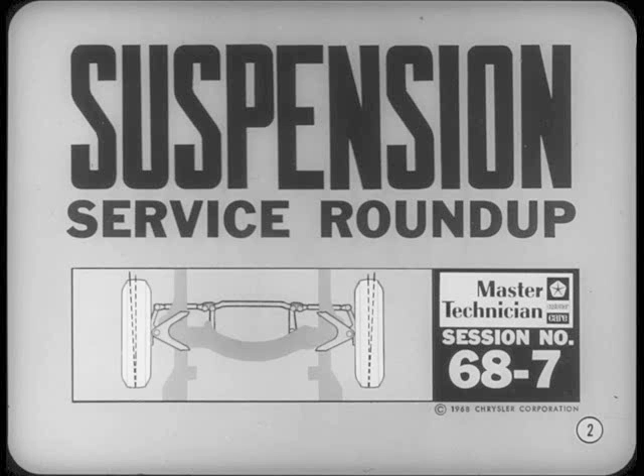Why the frown, Ted? You got a tough one? Nah. I was going to bounce this job to check the front shock absorbers, but there's no place to stand on the bumper. Well, bouncing a car can give you some idea of shock absorber action if they're badly worn or leaking. But on a car like this, you'll need a road test to make a complete shock absorber check. Well, I thought all you had to do was bounce the car to check shock absorbers.

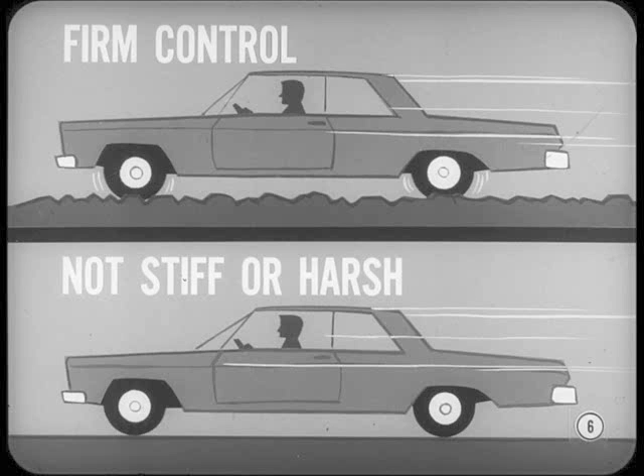Hiya, Tech. You're just in time to help us bring Ted up to date on shock absorber testing. Jim's right, Ted. Bouncing a car in the shop can't give the abrupt movement you need for a complete test. You see, shock absorbers are designed to give variable resistance to suspension movement as needed. They do this so the ride has firm control on rough, bumpy surfaces, but is not stiff or harsh on

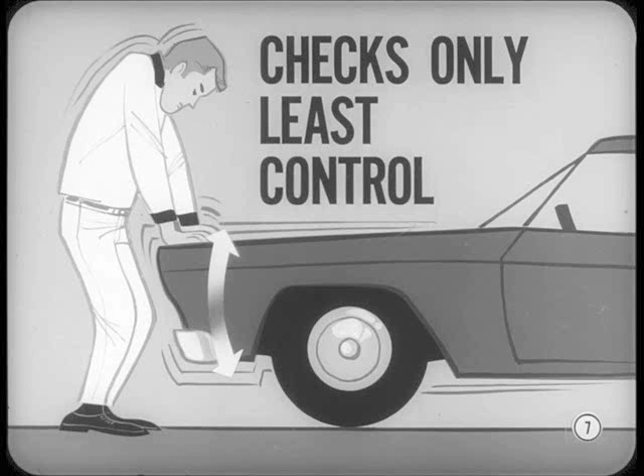smooth pavement. Now, if you try to test a car in the shop, the relatively slow bouncing movement you can apply checks the shock absorbers only where they normally give the least amount of control. Besides, bouncing may not help much to tell you which side is acting up. Why worry about sides? Aren't you supposed to replace shock absorbers in pairs? Only where high mileage or bad leaks make their general condition doubtful. On fairly new cars, there's no need to put on a pair if only one shock absorber goes sour.

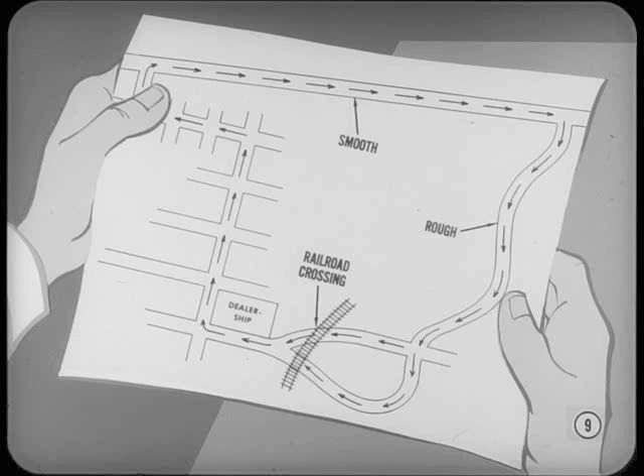Okay, I'm sold on the need for road testing, but how can you tell what's good or bad? Well, first of all, you should pick out a regular test route which includes both smooth and rough pavement, and, if possible, a fairly rough railroad crossing. When you have a run lined up, take a car which you know has good ride characteristics and drive it over your test route several times at different speeds.

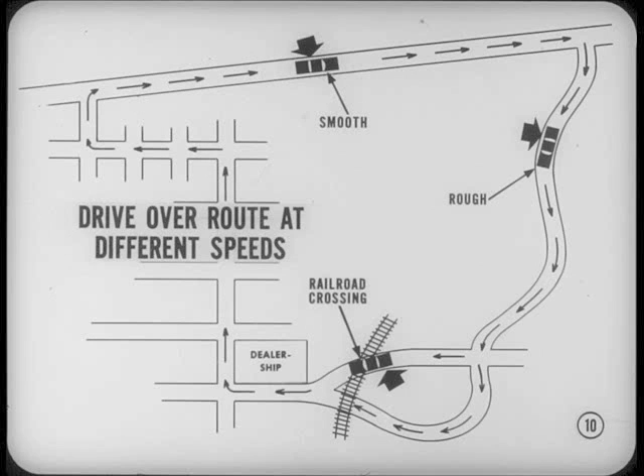This will give you a standard for comparison for checking the suspension ride control of other cars of the same model. Be sure to note the effects of specific rough spots along the route. If good shock absorber action handles them okay at certain speeds, your test car should do as well if its suspension and shock absorbers are up to standard. Why bother with a train crossing if there's a rough section of pavement handy?

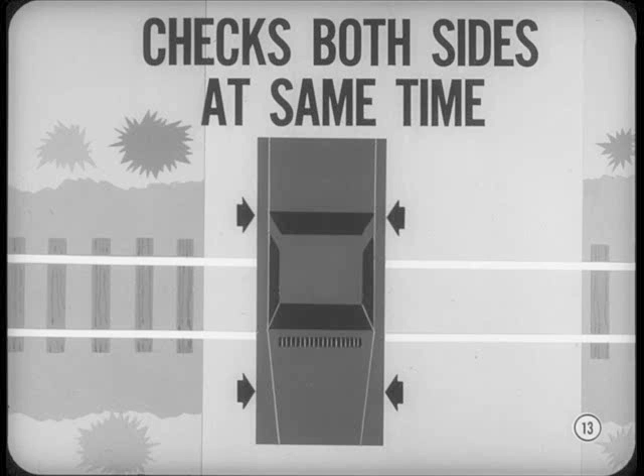Because crossings with abrupt level changes between the rails call for maximum shock absorber control. This is a good test for suspension strike-through, especially at the front end. In addition, a straight rail crossing checks the shock absorber action on both sides at the same time, as first the front and then the rear wheels pass over the tracks. If the tracks cross your drive path at an angle so the car wheels do not hit the same rail in pairs, the test will help you pick out any difference in shock absorber action as each wheel reacts separately

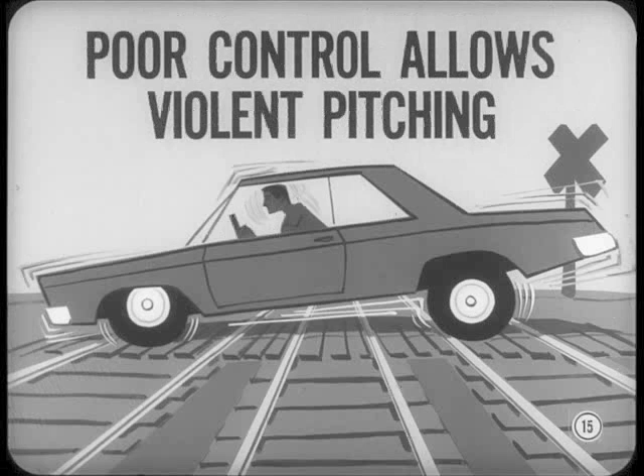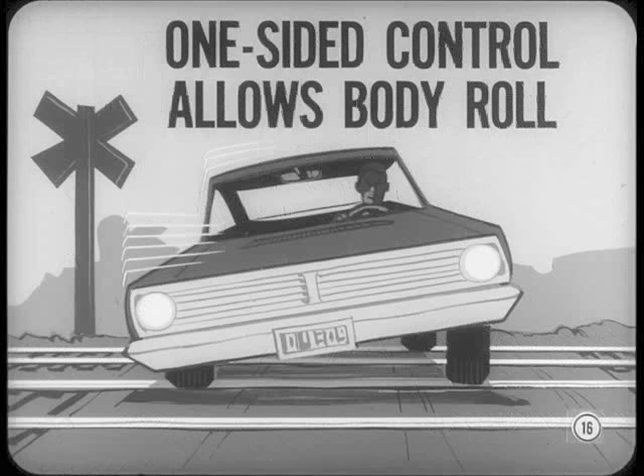to the rails. As you drive over several sets of tracks, generally poor shock absorber control can allow violent pitching motion. Even at low speeds, this movement can cause repeated suspension strike-through, both front and rear. Besides this, where a front shock absorber on one side does not control properly, it'll allow a body rolling movement as the car crosses the tracks. We'll talk about other chassis conditions which can cause this rolling motion farther on.

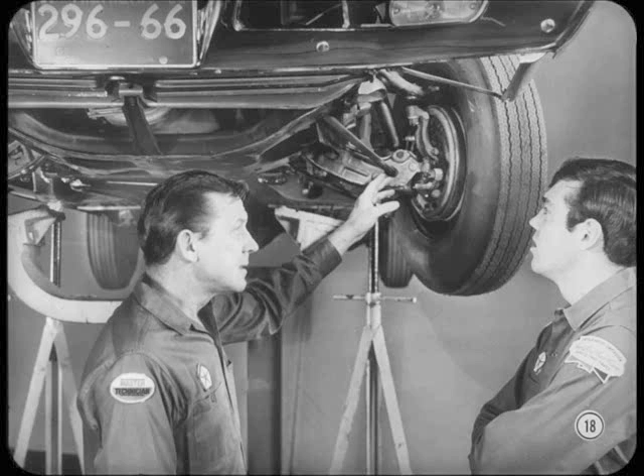If the body roll is caused by a weak shock absorber, how do you tell which one it is? You'll notice that the side with the poor shock absorber has a greater tendency to bounce. However, if there's any doubt, raise the front end of the car to let the suspension hang free so you can disconnect the suspected shock absorber at the bottom. Then extend and compress the shock absorber by hand so you can check its action.

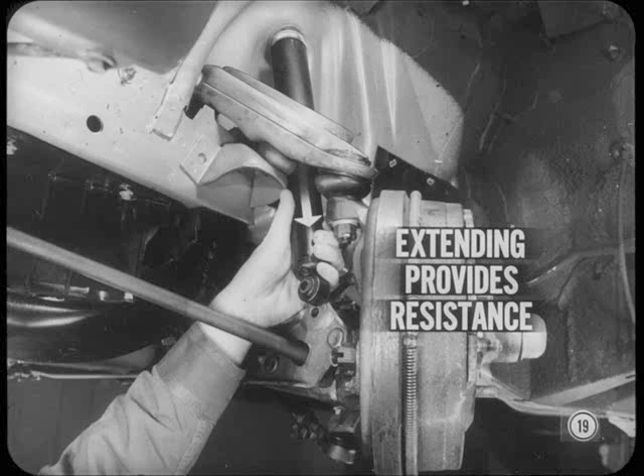As you probably know, extending a shock absorber normally provides resistance to movement. This resistance controls the upward movement of the car body or rebound of the suspension after it reacts to a bump. In the opposite direction, the shock absorber also resists movement as it is compressed. This allows the shock absorber to control upward movement of the suspension as the wheels hit bumps or other high spots in the drive path.

When you make the test, resistance to movement in either direction should be smooth and consistent. If there's little overall resistance or you notice soft spots in the movement, a new shock absorber should be installed. Well, how about leakage? I've heard that a wet area on the shock absorber body means it's losing fluid. It could be, if the wetness is actually shock absorber fluid and not something else. Disconnect and check the shock absorber if there's any doubt.

Incidentally, before you put on a new shock absorber, be sure to purge the operating cylinder of any air which may have entered from the reservoir chamber during storage or handling. Here's what you do.

Hold the shock absorber right side up and extend it all the way. Then turn the unit upside down and compress it. Repeat both steps several times, but do not extend the unit when it's inverted or horizontal.

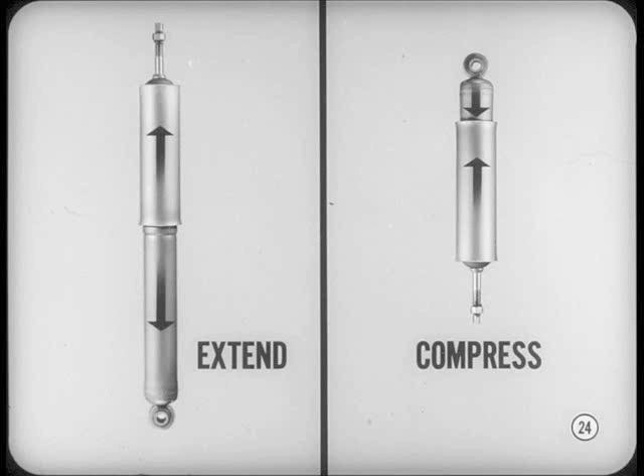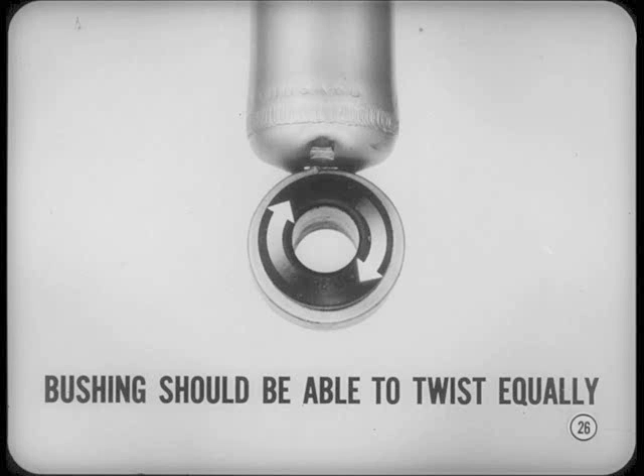And when you install a new shock absorber, be sure to center the rubber mounting bushings and use the correct tightening torque. You see, bushing life can be shortened quite a bit if they're not centered or are over-tightened. Well, I understand correct tightening, but what's this bushing centering business?

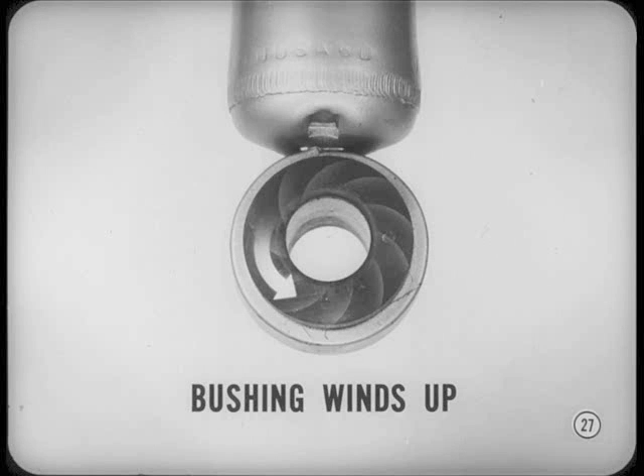Well, the rubber bushing used in a shock absorber ring mount should be able to twist equally in either operating direction as the suspension moves. However, if you tighten the mounting nut with the car raised off its wheels, the bushing winds up when the wheels and suspension parts return to normal load position. This wind-up puts a constant one-way strain on the bushing.

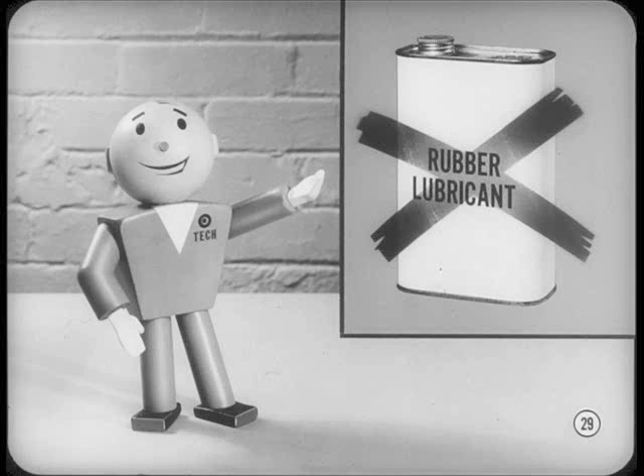In fact, when you install rubber bushed parts or separate bushings anywhere in the car suspension, be sure to center the bushings with the suspension in normal load position before they're tightened. Care to add anything else, Tech? Yep. Don't use lubricant of any kind on these rubber bushings before or after they're installed. Lubricant can allow the bushing to slip and wear out instead of flexing normally.

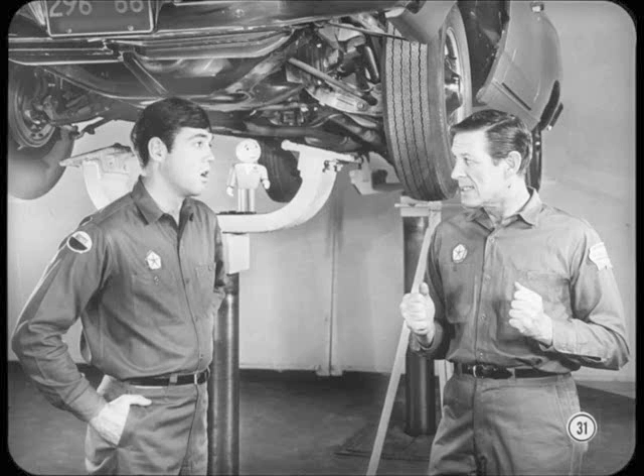Now back to the ride test, Jim. You may find it easier to check wheel action when you drive on rough pavement. Here you'll have to pick out specific bumps and holes so you can compare shock absorber action on repeat runs. Well, how about the smooth pavement part of the test run? Compared to your standard car, you shouldn't notice excessive stiffness or harshness on a test ride. Ride control should also compare well when you drive over any thank you ma'ams on your run.

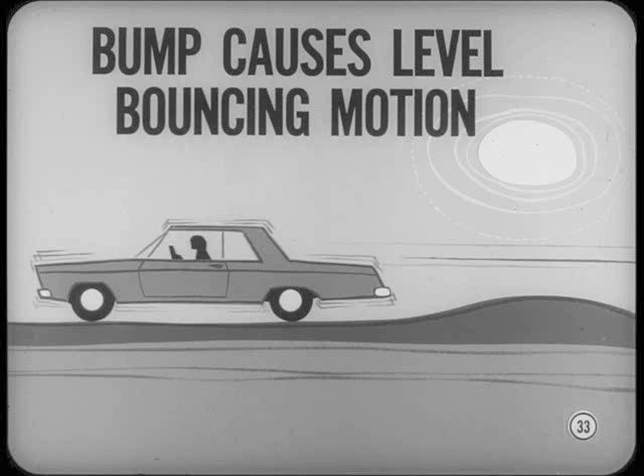Hold it, Jim. What's a thank you ma'am? Well, it's a sort of smooth rolling bump which you may find at some street crossings, culverts, or short bridges. When you drive over one at low speed, this bump can cause a repeated, level bouncing motion of the car body, especially if the shock absorbers and suspension are not up to standard. At higher speeds, the car can go into a pitching bounce with repeated strike-through front and rear as the suspension bottoms. In fact, the pitching movement may try to lift you off the seat. And you'll be glad you remembered to fasten the seat belt.

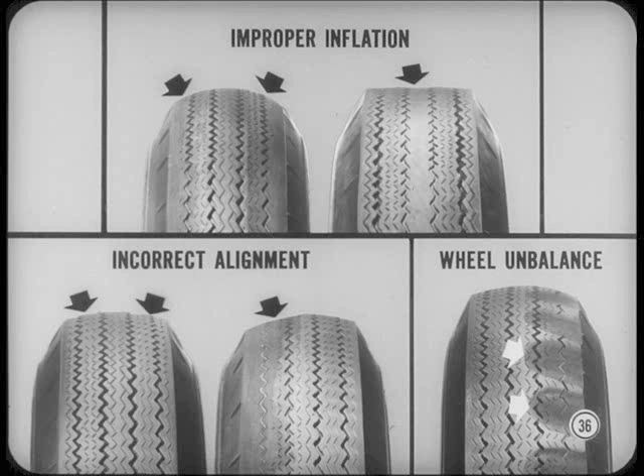Now, before Ted asks, you'd better tell us about other chassis conditions which should be checked before making a test ride. First of all, the tires must be inflated properly. And don't forget that worn tires do not ride the same as new ones. When you check tire pressures, inspect the treads for flat spots or irregular wear, which can be caused by improper inflation, incorrect wheel alignment, or wheel unbalance. Just remember that the ride will be affected both by uneven tread wear and by the condition which caused it.

In addition to tires, be sure to check the front suspension height, especially where the customer mentions that the suspension bottoms. Adjust the suspension height if needed so you can get an accurate shock absorber test. If you forget to check out a car which has uneven front suspension height, you'll probably get a body rolling effect when crossing railroad tracks, even with good shock absorbers.

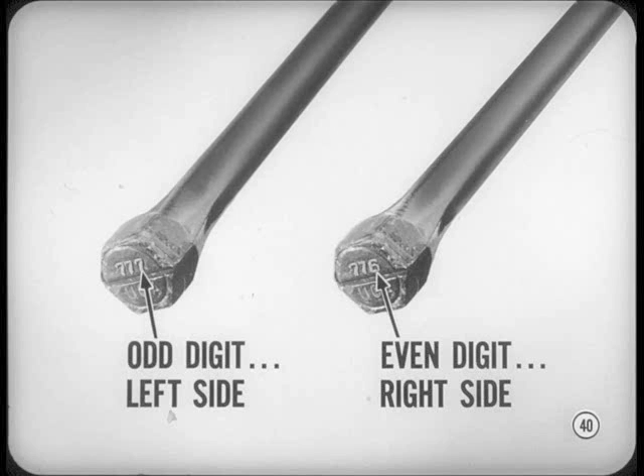And while we're on the subject of rolling, you may get a car which checks out okay in the shock absorber department, but has a one-sided rolling tendency, even on fairly smooth pavement. Where this happens, be sure to check the torsion bar on the side that tends to drop. You see, our torsion bars are specially treated and pre-stressed for use on specific sides of the car. The last 3 digits of the bar part number are stamped on the anchor end. If the numbers end with an odd digit, the bar's for the left side. An even end digit is for the right side.

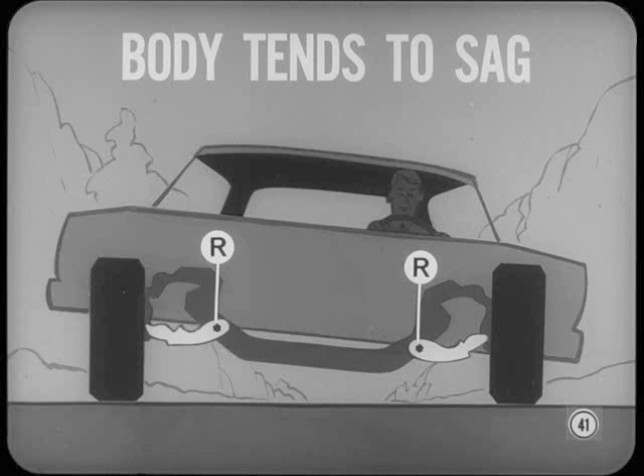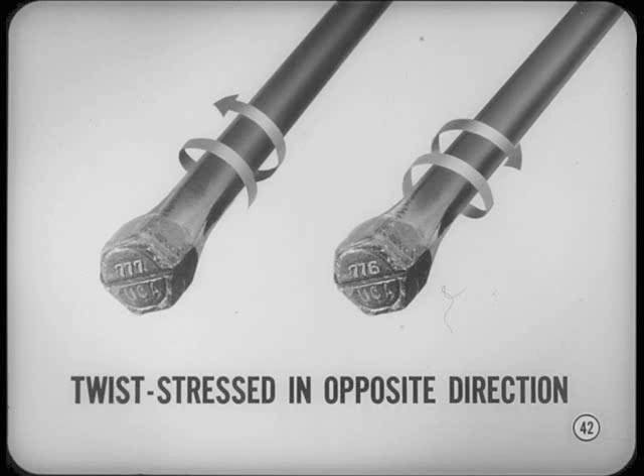If 2 right or 2 left torsion bars were installed on a car, you'll find that the body tends to sag on the side with the wrong bar. This is a condition which adjustments or new shock absorbers cannot cure. Good points, Ted. The reason for pre-stressing torsion bars is simple. All new car torsion springs tend to settle a bit at the beginning. To compensate for this, our torsion bars are twist-stressed slightly in the opposite direction.

When you install a new torsion bar, be sure to inspect the new bar carefully all over for score marks or nicks. All scratches and nicks must be dressed down to get rid of sharp edges so torsion will not set up stresses at these points.

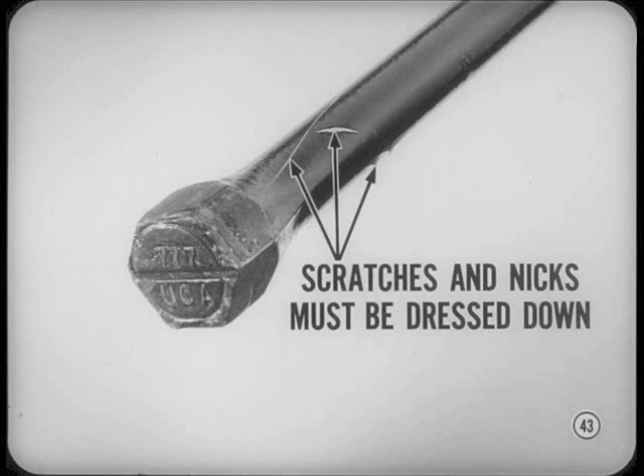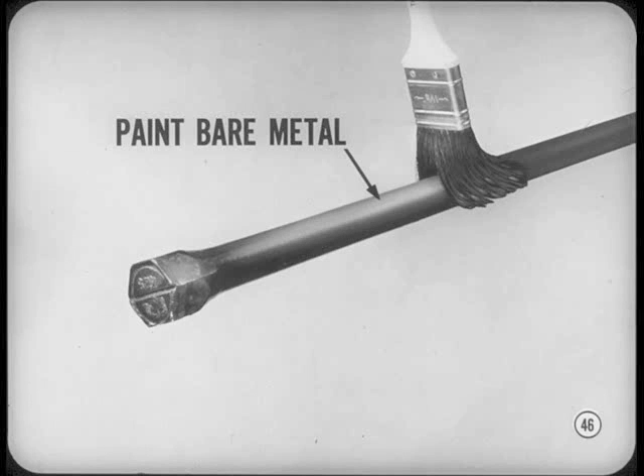It's important to inspect torsion bars because sharp-edged nicks, scratches, or score marks in the outside surface of a torsion bar are the same as open cuts. When surface tension is set up by twisting, nicks can open up and cause a fracture or break. If you dress down any spots on a torsion bar, don't forget to paint the bare metal to protect it against rusting. Like nicks and scratches, rust or pitting can also weaken a torsion bar.

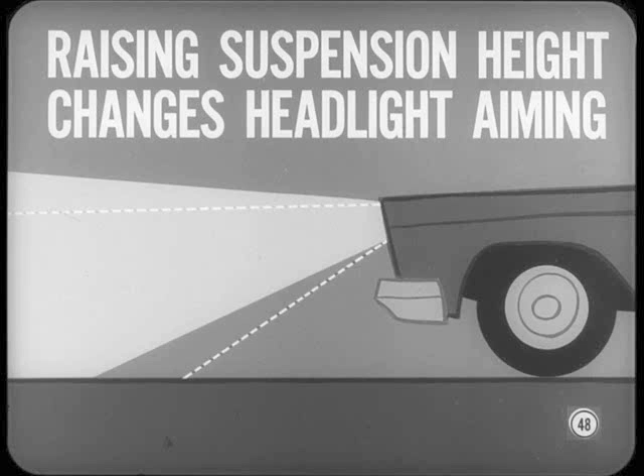Now, a few final reminders on torsion bar installation. Clean out the rear anchor and lube both ends of the bar to make installation easier. Before installing the bar seal, pack the annular opening in the rear anchor completely full of multi-mileage lubricant to guard against rust. One more thing on torsion bar replacement or adjustment. Don't forget that raising the suspension height changes headlight aiming and can also affect wheel alignment. It's good practice to check both the aiming and alignment after adjusting suspension height.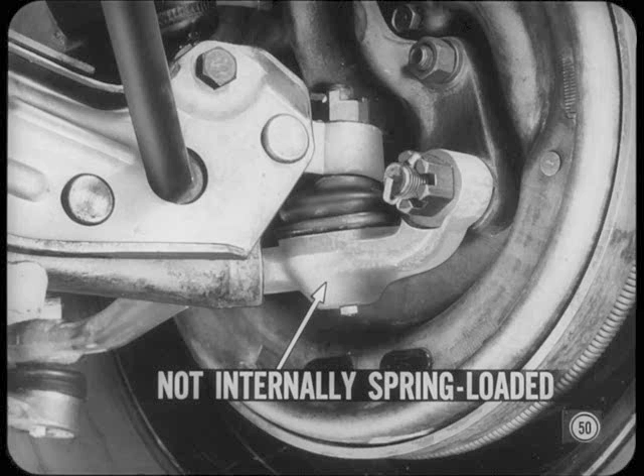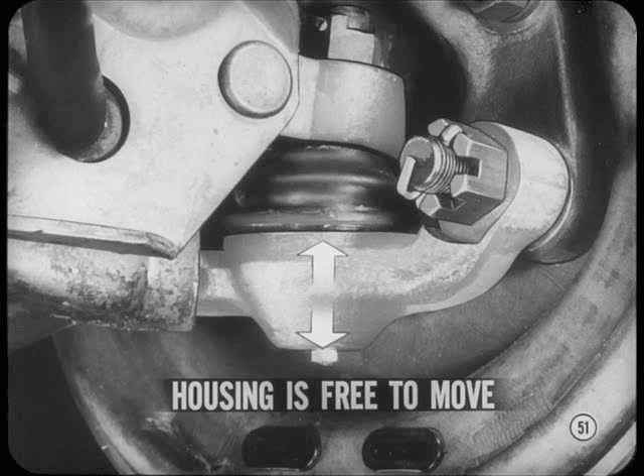While you're talking about the front end, Jim, why don't you tell Ted about checking ball joints? Well, there's some confusion about the normal amount of play you'll find in the lower ball joints. You see, except for the Imperials, the lower ball joints on all Chrysler Corporation cars are not internally spring-loaded. This is done primarily to reduce steering effort and wear. But with no spring loading, the ball joint housing is free to move up and down a bit when there's no load on the joint. This movement is normal if it's within specification limits.

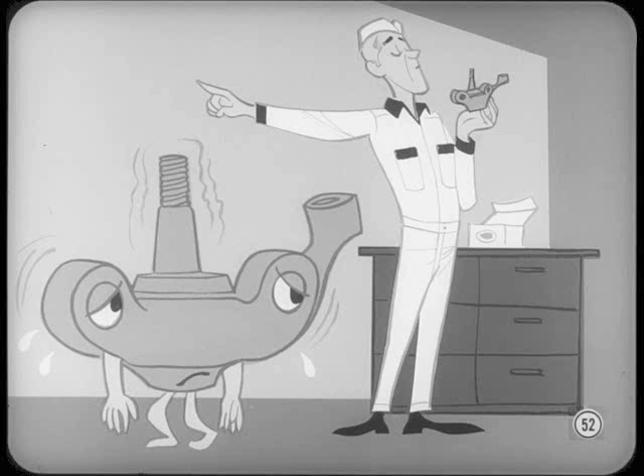However, some technicians don't know that some play should be expected at this point. When they detect this movement at a lower ball joint, they assume it's badly worn and recommend replacement. In actual operation, the play in the lower ball joints disappears because car weight normally keeps the ball joint parts seated. In fact, with torsion bar suspension design, the full front-end weight load is carried by the lower ball joints.

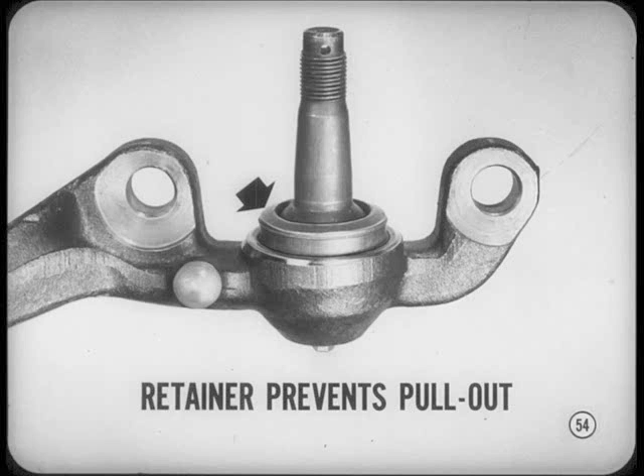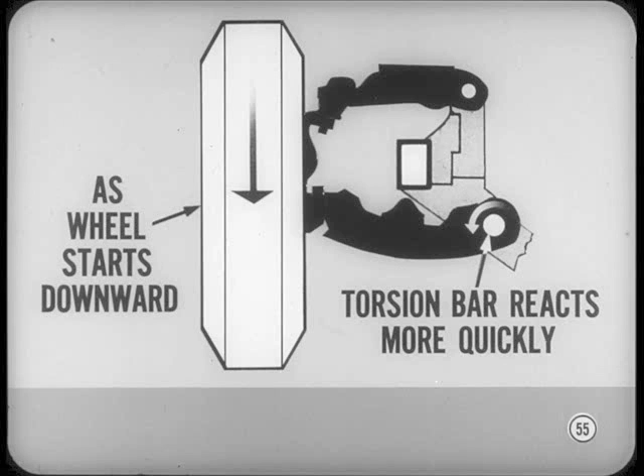If the parts of a lower ball joint can move up and down, what keeps it from pulling apart when the going's really rough? For one thing, the parts are held in by a retainer which prevents pull-out. Besides that, as the wheel and suspension assembly starts to drop downward in the rebound direction, the torsion bar reacts more quickly than the suspension, so the ball joint remains properly seated. Good points, Jim. If you were paid for every good lower ball joint that's been junked, you'd be rich.

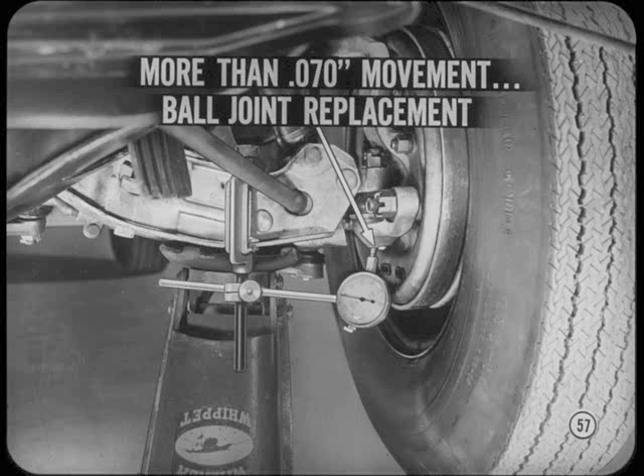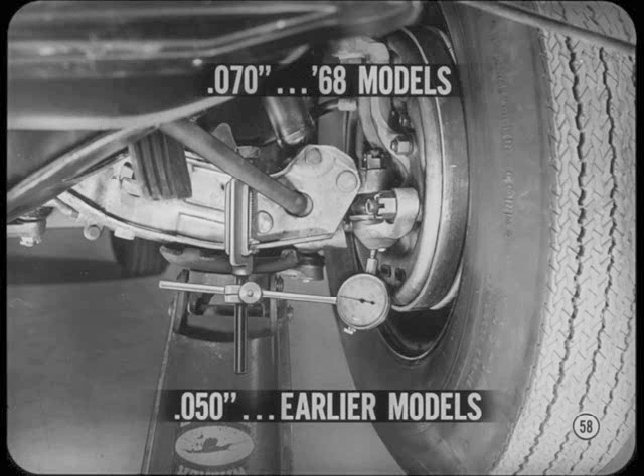Now, how about a quickie on checking ball joint play? Just roll a jack under the lower control arm near its outer end and raise the wheel off the floor. Then, lift the wheel upward so you can check the movement of the lower ball joint housing. There should not be more than 70 thousandths of an inch of housing movement, or the ball joint should be replaced. There should not be any play in lower ball joints on Imperials beginning with the 67 models. That 70 thousandth spec is brand new and applies to the 68 models. On earlier model cars, the old 50 thousandths of an inch limit still applies.

Thank you, Tech. Now, on your inspection, be sure you check lower ball joint play at the joint housing. If you take a gamble based on wheel movement alone, you could be misled by loose wheel bearings. What's the story on the upper ball joints? The upper ball joints of all our cars are spring-loaded to eliminate the kind of play that's normal in the lower joints. To check these joints for wear, you can use the same setup as for checking the lower ball joints. Here, you move the wheel in and out at the top while you check the joint. If there's any movement at all, replace the joint. But don't be fooled by lower ball joint movement or a loose wheel bearing.

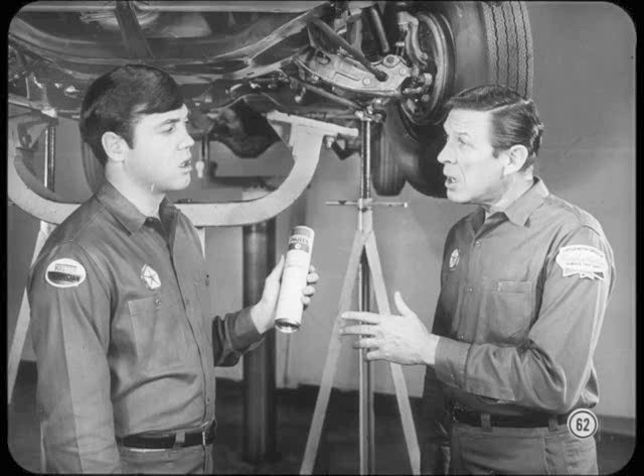What happens if you don't use the multi-mileage lubricant specified in the service manual for chassis parts? If you use a lubricant which doesn't meet the same standards, it may not lubricate as well or last as long, so parts' life can be shortened. When you do a lube job, do not over-pressurize the seals at ball joints, steering arm, idler arm, and tie rod ends. If these seals are ruptured, they'll have to be replaced so the parts will be protected against premature wear.

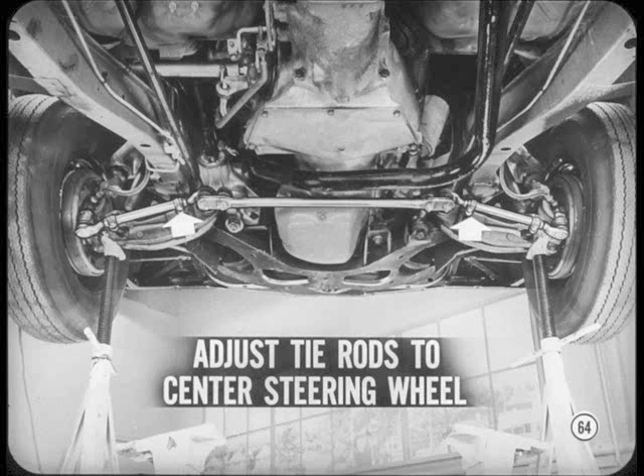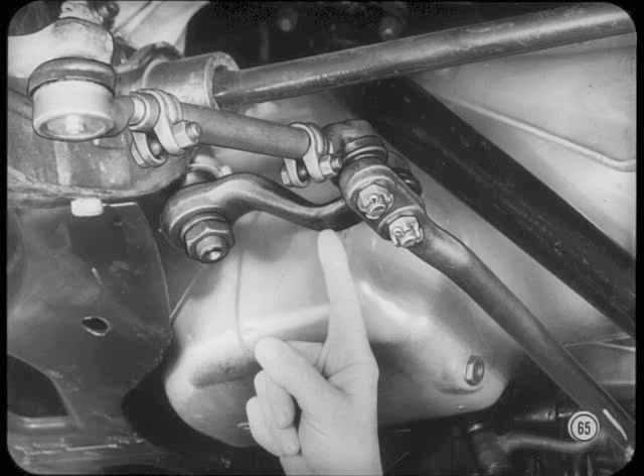Now, here's a quick one on linkage adjustment. You normally adjust both tie rods to shift the steering gear arm to correct the steering wheel position if the wheel spokes do not center in the straight-ahead position. However, if you install a new steering gear arm and then run out of tie rod adjustment before the steering wheel spokes are centered, you'd better make sure the steering arm's the right one for that car.

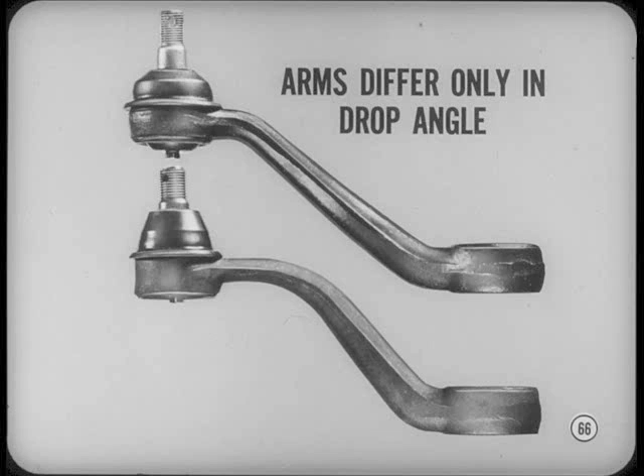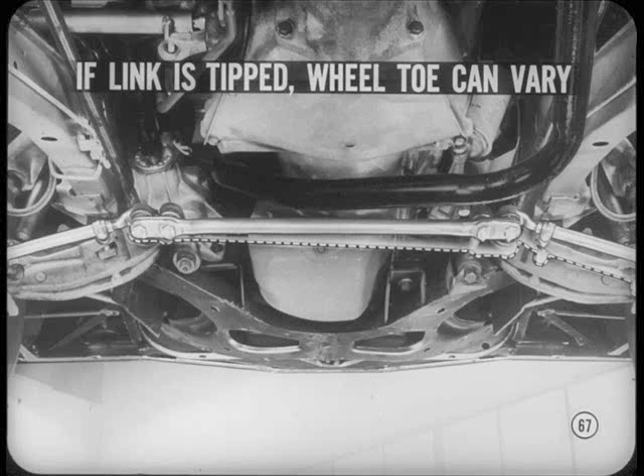You see, some steering arms differ only in the drop angle of the arm, so mix-ups are possible. Where steering arm and idler arm angles are not the same, the center link will be low at one end, and this limits the amount of tie rod centering adjustment. In addition, if the center link is tipped from its normal horizontal position, front wheel toe-in can vary quite a bit from the basic setting as the suspension moves up and down. This variation reduces directional stability and can cause steering wander.

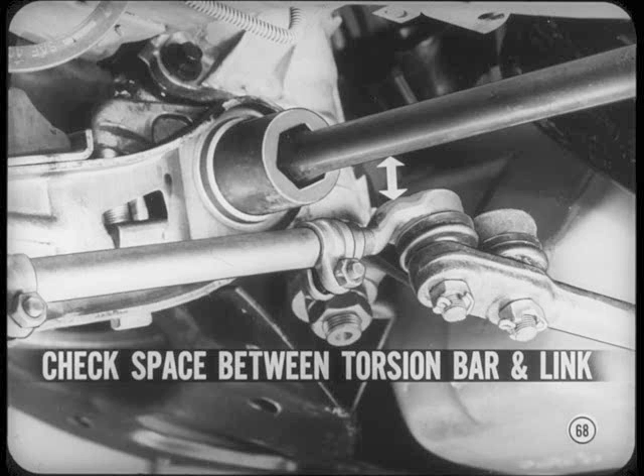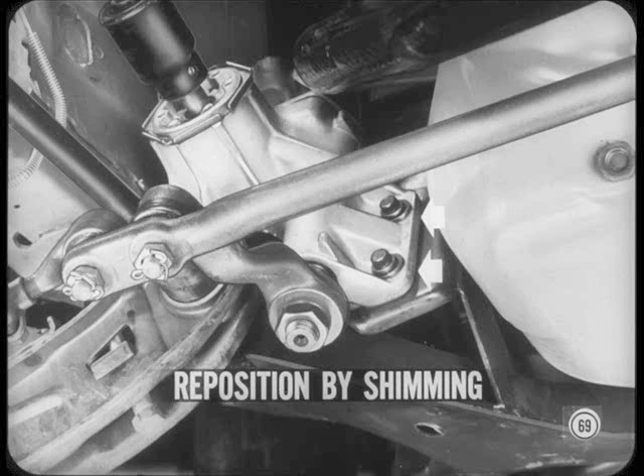Where you suspect the wrong steering arms installed on a car, set the wheels straight ahead and check the space between the torsion bar and the center link at each end of the link. If the spacing is uneven by more than 1/4 of an inch, the arm may be incorrect for that car. But if the steering arm's okay, the uneven center link alignment can be caused by an incorrect steering gear mounting position. You can reposition the steering gear and its arm by shimming the gear mounting. However, where you shim the gear, don't forget to realign the steering column.

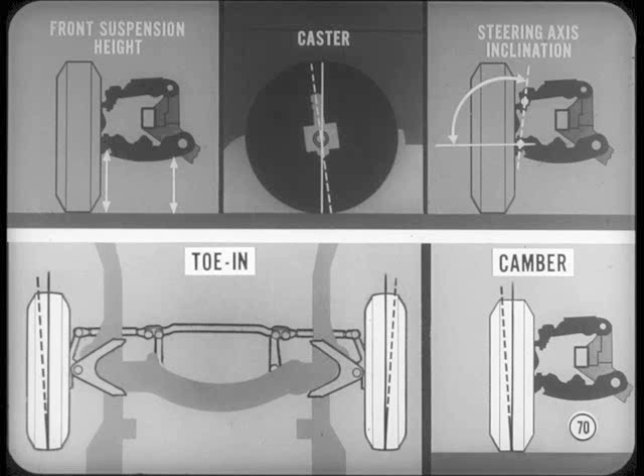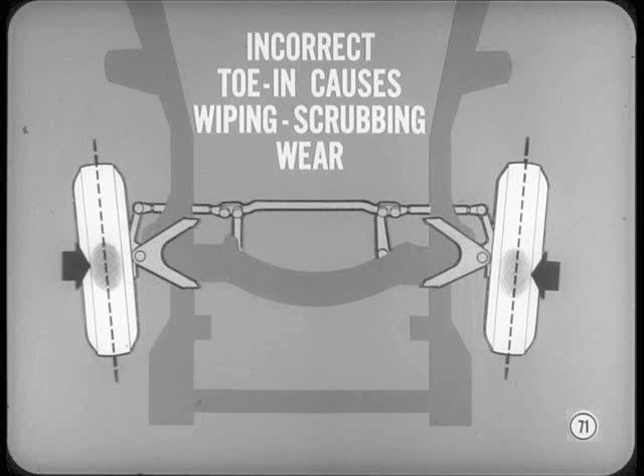Since you've mentioned wheel toe, this might be a good place to review a few points on wheel alignment and tire wear. Right, Ted. Of course, all front wheel alignment adjustments must be correct for good steering and handling, but toe-in and camber are the most important where tire wear is concerned. Incorrect toe-in causes a wiping or scrubbing kind of wear at the edges of the tire shoulders and tread ribs. This wearing action leaves thin feather edges on the inner sides when toe-in is excessive, or on outer sides when there's toe-out. Compared to this, too much camber causes rapid wear at the tire shoulders. Excessive positive camber mostly affects the outside shoulder, while negative camber works heavily on the inside shoulder.

Of course, there are other tire wear causes such as under or overinflation, delayed tire rotation, soft shock absorber action, unbalanced wheels, high road speeds, jackrabbit starts, and excessive cornering. However, these factors depend mostly on the customer. All right, Jim, but why are toe-in and camber needed at all? Reduced to the simplest terms, you could say they're both a kind of preload. It's a bit like the reason I mentioned earlier for pre-stressing torsion bars.

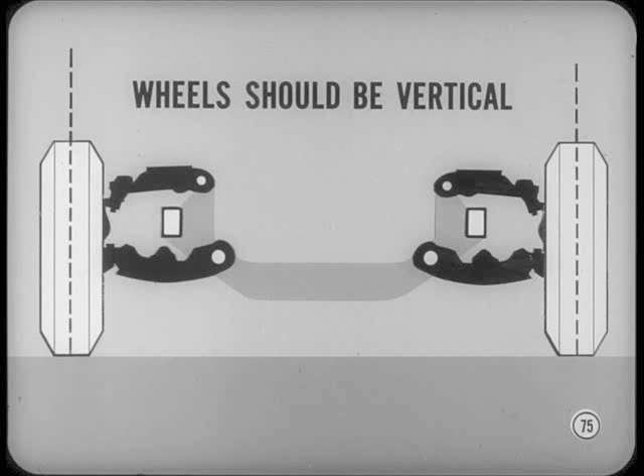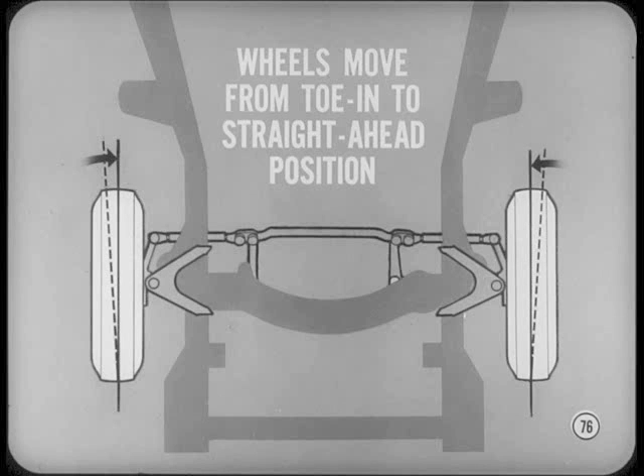Here's what happens. Ideally, all four wheels should be vertical and run in straight lines to get the best tire mileage. However, front tire rolling resistance tries to make the wheels toe out, and when the car is loaded, movement of the suspension tilts the wheels inward at the top. To compensate for these variations, we preset the front wheels to give them toe-in when the car is standing still. When rolling forces act on the tires, the wheels move from toe-in to a straight ahead position. In like manner, the front wheels are also set with positive camber, which tilts them out at the top when the car is not loaded. This allows the suspension to move the wheels inward toward the desired vertical position when the car is loaded normally.

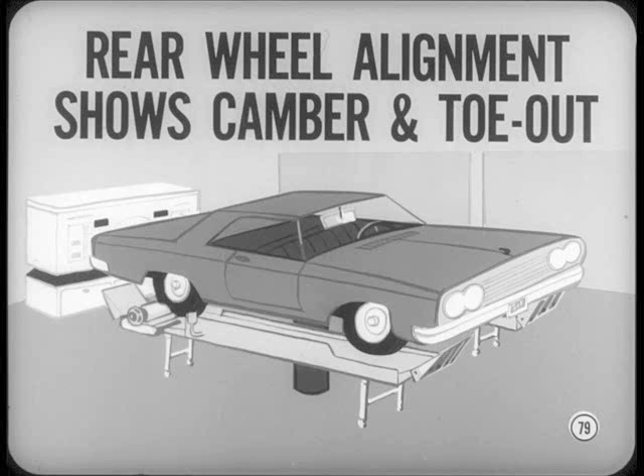Well, you said all four wheels should run straight under load. What about the rear wheels? The same kind of load compensation is built into the rear axle housing for proper running alignment. But here, because traction power is applied to the tires, the wheels tend to toe in instead of toeing out. In fact, if you check rear wheel alignment for any reason, don't be surprised if a slight amount of positive camber and toe-out shows up on your machine. Here again, when loads are applied, normal deflection of the parts moves toward the desired alignment.

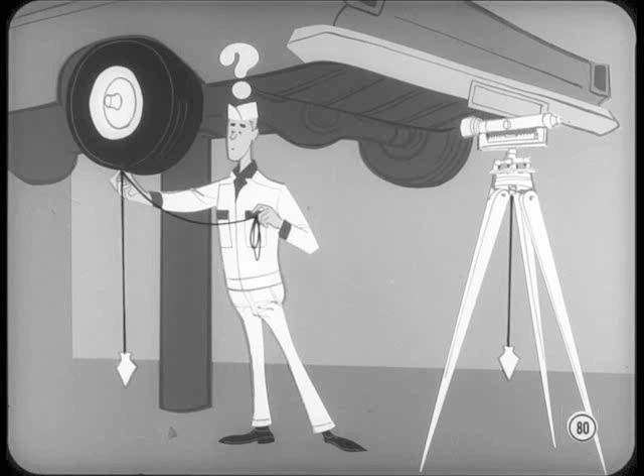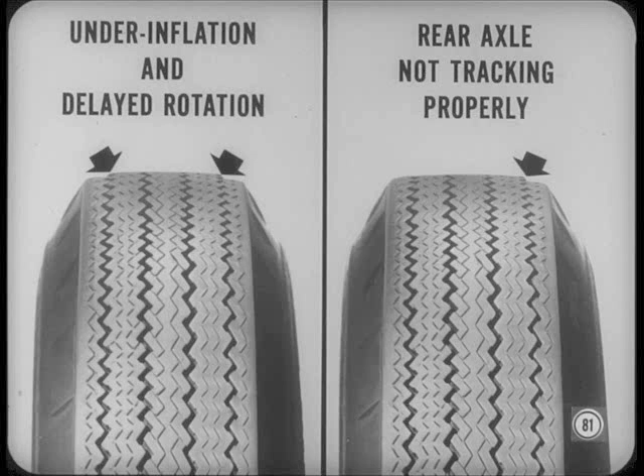Incidentally, I've heard of some technicians who have blamed heavy tire shoulder wear on the normal camber and toe-out that's built into the rear axle. They incorrectly assume that anything other than 0-0 alignment means a bent axle. Actually, heavy shoulder wear that's equal on both sides of a rear tire is usually caused by underinflation and delayed tire rotation. If this shoulder wear is unequal, it could mean that the rear axle is not tracking properly. And another thing, before you blame poor rear wheel tracking on a bent rear axle, make sure both springs are equal in length and that the axle has not shifted on the springs. If the axle housing is bent, it should be replaced. And that concludes my lecture for today.

Jim and Ted have taken us from front to rear with highlights on car suspension servicing. Some of the points in this roundup are new, others aren't. But it never hurts to double-check your know-how. Car suspension and wheel alignment are big subjects, so you'll have to add your service manual instructions to the spotlight treatment given here. Extra information is also included in your reference books for this session, so don't forget to read them through.